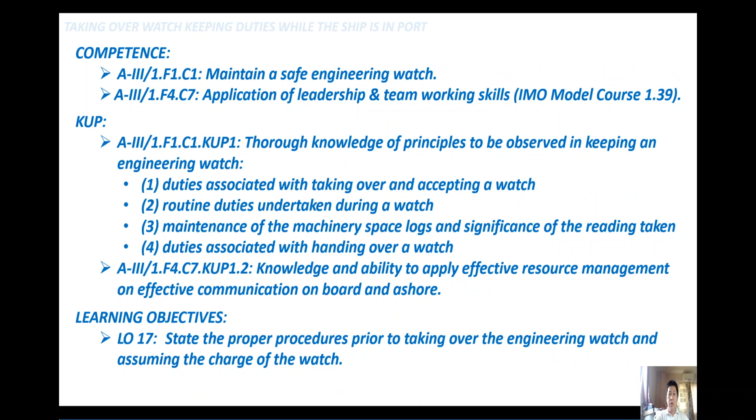So let us proceed. We have here: state the proper procedures prior to taking over the engineering watch and assuming the charge of the watch.

Prior to taking over the engineering watch, the relieving officer must be informed by the officer in charge of the engineering watch as to the standing orders of the day, any special orders relating to the ship's operations, maintenance function, and repairs to the ship's machinery or control equipment.

So here we have the sample of chief engineer standing orders. This is too small, but I can give you some examples here.

These are familiarization checklists, included in the standing order of the chief engineer. All engineers shall understand that the chief engineer is always available, that they can judge as necessary or appropriate. If in doubt about any instructions or orders, the engineer shall immediately seek clarification from the chief engineer.

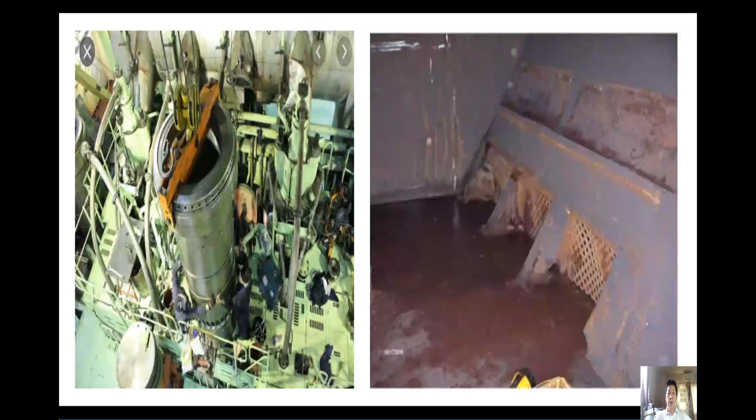These are several examples, but I'll show you one: the bilges or bilge water in your engine room, or let's say in the cargo hold. The relieving engineer should be informed that there is remaining water that should be pumped into the bilge tank.

So this should be informed because the bilge water should be monitored, and of course there is a bilge alarm system. It should be empty at all times, or in lower level. So the relieving watch should be informed about this bilge water.

Bilge area is the area in your engine room, and also in your cargo hold, where leaking water from your machinery goes. So that is bilge water going to the bilge area. This is the example.

So here we have an example, but we will not show you all of them. I will only show you the residue and bilges, because this is a lot and it takes a lot of time to discuss.

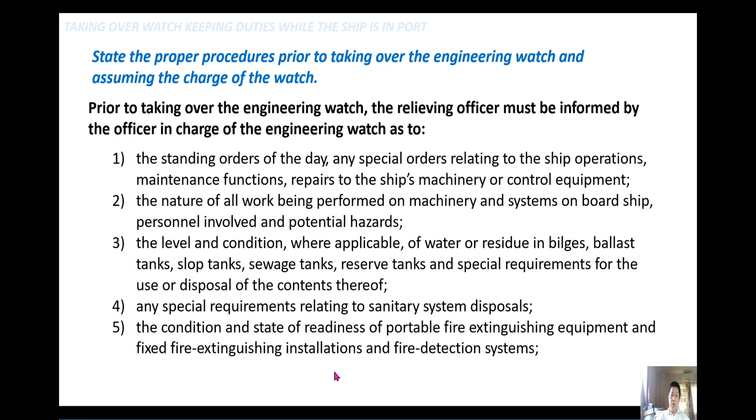So next we have sanitary requirements and disposal. One example is the sewage treatment plant. Then there's the condition and state of readiness of portable fire extinguishing equipment, fire extinguishing installation, and fire detection system.

Here we have an example - this is your fire detection system, and of course it is found in your computer, especially when your ship is operated with an automation system. You can find if there's an alarm in your computer monitoring system, so you should check your alarm if there is something wrong with your fire alarm system.

When it comes to the call point, you break the glass in case of fire and sound the alarm. This is the manual call point, and these are your heat detectors and smoke detectors. You should be familiar with where these are located so that if there's an alarm you can go there. The engineer on watch should hand over to the relieving engineer on watch if there is something wrong with the fire alarm, so you should be familiar with this.

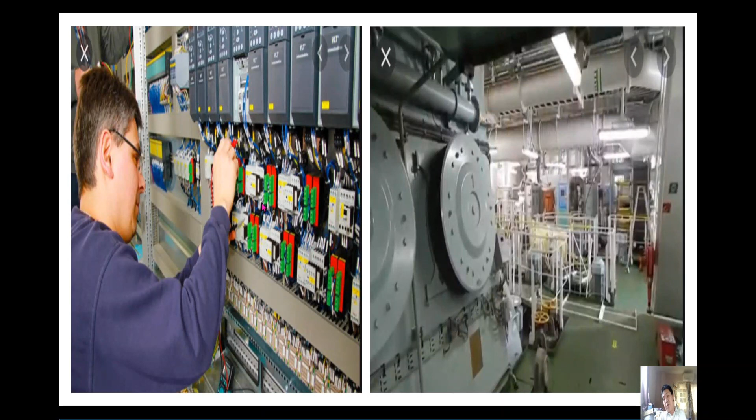So we have an example - if there is a technician on board, for example your ship is at anchorage or in port, and if the ship's engineer requests a repair of, for example, electronic or electrical equipment, while you are in charge of the engineering watch, when you hand over to the next engineer on watch you have to give instruction on what is done and what is to be done. If there's a technician working, this is for the purpose of safety and for recording, because you have to record in the engine logbook what is being done in the repair works in the engine room. So for an electrical or electronic system, you have to give instruction to the relieving engineer on watch.

So next, we have also here any port regulation pertaining to the effluents. Ship effluents is pertaining about the disposals, the sewage. And then firefighting requirements, and ship readiness, particularly during potential bad weather conditions.

So here also, this is your engine room. For example, if your ship is sailing or navigating and there is a bad weather condition, the captain is informing to the engine control room that there is bad weather. You should secure all the rolling objects here in the engine room. So if you are engineer on watch, you have to secure it together with your engine ratings on the watch.

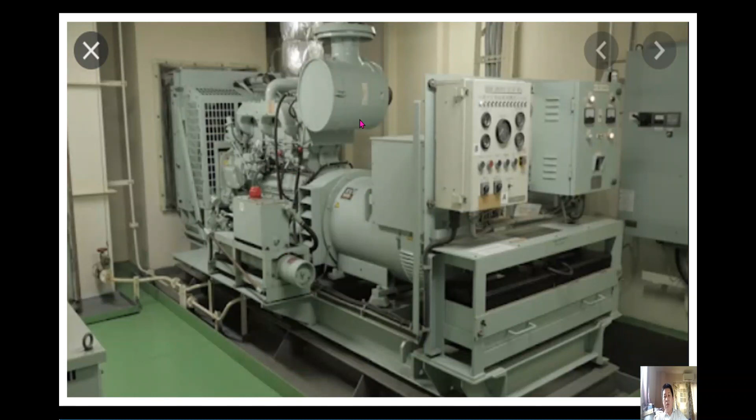So you should know how to prepare the main propulsion engine, and also, for example, your emergency generator should be switched to automatic mode, because in case of blackout, this emergency generator will start automatically within 45 seconds and give what we call emergency power to the emergency switchboard. Then the emergency switchboard will give emergency power to the lighting, vital equipment, bridge equipment, and engineering equipment for the purpose of emergency.

So next we discuss the principles applying to all watchkeeping in port. Prior to taking over the engineering watch, relieving officers shall satisfy themselves regarding at least the following: the standing orders and special instructions, which we already discussed; the nature of work being performed; levels of the tanks, the wells, bilges, slop tanks, reserve tanks; and condition of fuel and settling tank.

So the condition of the level of fuel in the settling tank and the day tank should be informed to the next relieving watch. If you are the relieving officer, you should check the day tank, the settling tank, and the other fuel storage tanks.

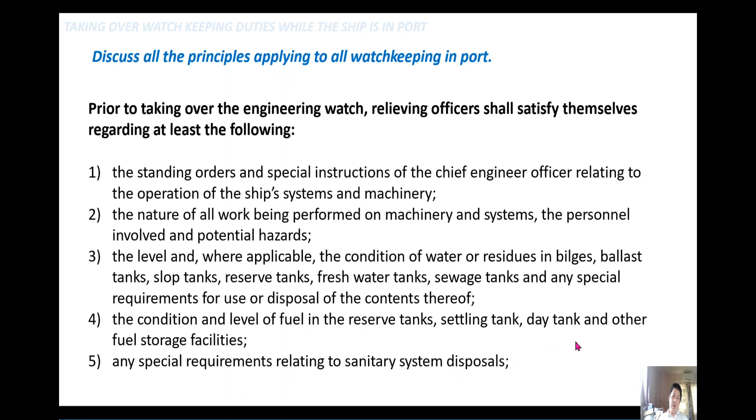Any special requirements relating to sanitary systems for disposal. As I said earlier, an example is the disposal of your bilge water overboard, and the disposal of your sewage. These are a few examples, not the only ones. So let us continue.

Here we discuss the principles and procedures that need to be observed when taking over watchkeeping duties while the ship is in port. When performing the watch, the person in charge of the engineering watch shall pay particular attention to the observance of orders, special operating procedures and regulations concerning hazardous conditions and their prevention in all areas in their charge.

So you have to observe all orders from the chief engineer, especially standing orders, and all important orders from your superiors. Instrumentation and control system: monitoring of all supplies and components of all systems and operation.

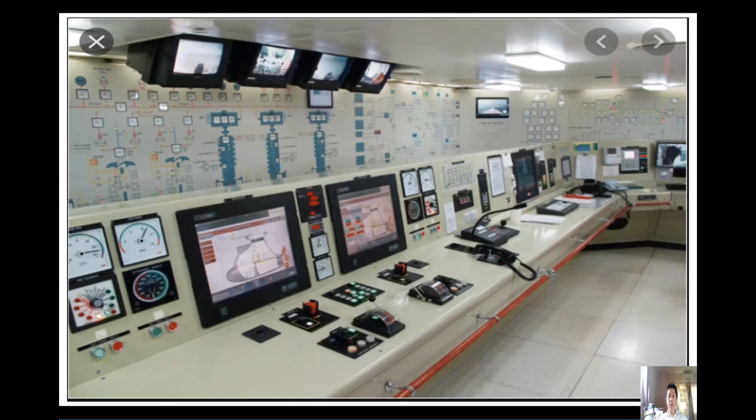So you have here your instrumentation. You have a lot of instrumentation in the engine room, and you have your computer monitor. So all the conditions here, alarms or whatever, the operational situation, you have to check all of this, all the instrumentation: amperes, pressures, temperatures. You can find everything here in your computer, in your instrumentation. You should be familiar with this as you take over the watch.

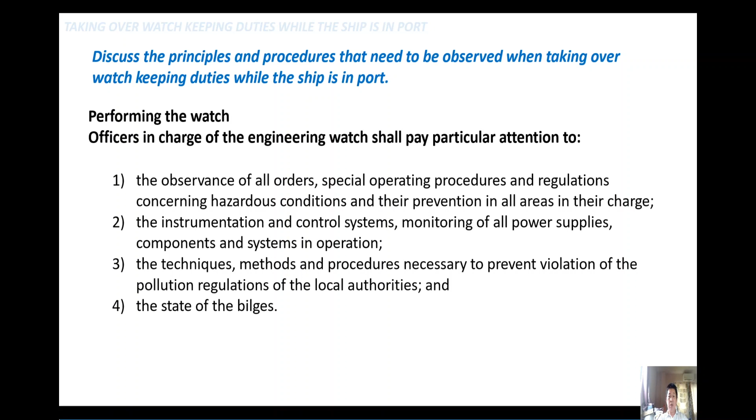So while in port: the techniques, methods, and procedures necessary to prevent violation of pollution regulations of the local authorities, and the state of the bilges. Everything you can monitor here in your control room, but on the other hand, your engine room round is also very important, because leaking you cannot monitor in here. So leaking, vibration of the pipes, you should make a round in your engine room during your watch.

So bilges, you have here the state of bilges, whether it is at normal level or empty. Before you relieve the previous watch, you should ask him what the condition is, and do not accept if there is a lot of bilge water in the engine room. You should tell the previous engineer on watch that he has to first pump the bilge water into the bilge tank.

So here we have explained that the officers in charge of the deck or engineering watch shall not hand over the watch to the relieving officer if they have any reason to believe that the latter is obviously not capable of carrying out watchkeeping duties effectively, in which case the master or the chief engineer shall be notified accordingly. The relieving officer of the engineering watch shall ensure that the members of the relieving engineering watch are apparently fully capable of performing their duties.

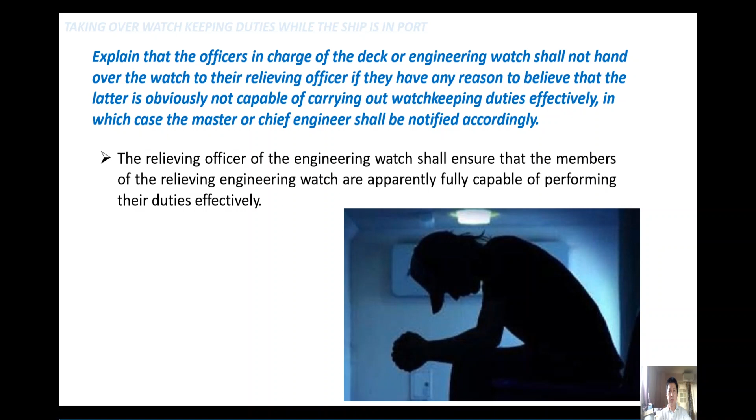So here, this system is an automated system, or what we call UMS, unattended machinery space. During night time, nobody in the engine room will do the watch. There is a watch in the cabin, what we call the cabin watch, but the engineer on cabin watch will go down if there is an alarm to be rectified.

So another thing here: when you are doing the watch, you should also check the logbook, whether all the operation is properly recorded. I remember before, when I was a second engineer on a ship, the third engineer was doing a lot of maintenance, but he was not recording it in the logbook. So I told him that he should record it in the logbook, because otherwise there is no history, there is no basis if something happens.

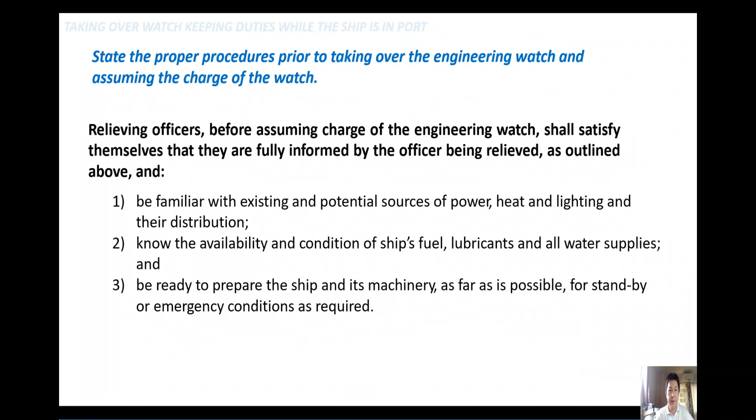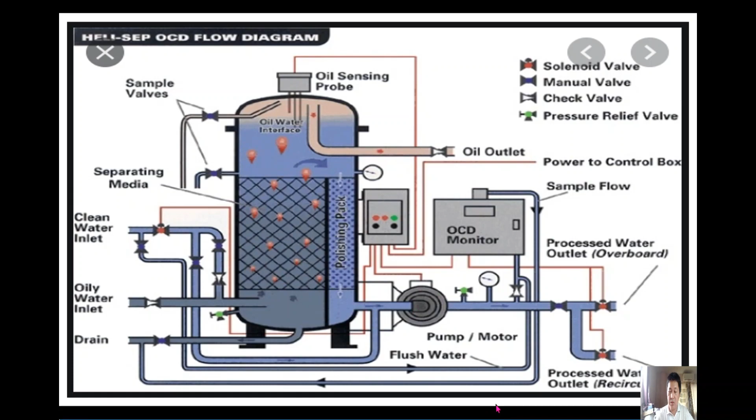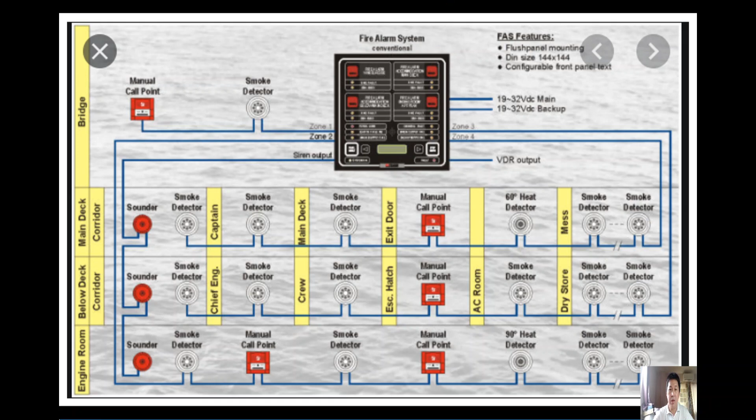Another thing, very important: disposals. Avoid disposals that pollute the environment, so you should be checking on this. The fire alarm system is very important; you should check on this before you take over the watch. This is disposal, sewage treatment; you should check on this before you relieve the watch. Maintenance, bilges, you should check on that. Standing orders of the chief engineer, whether they are followed.

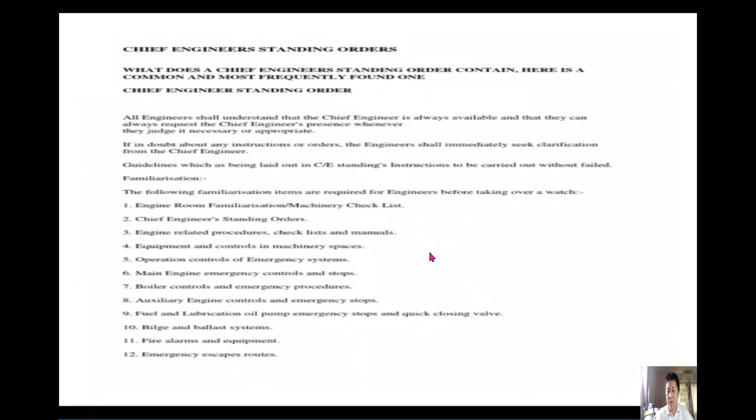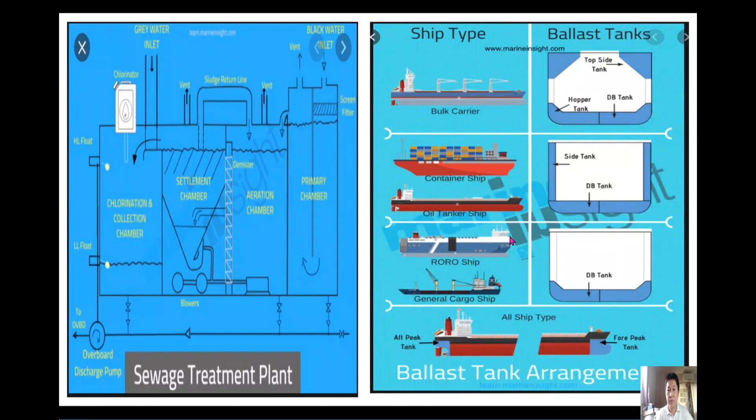So here, ballast system, you should check on that. Rolling objects in the engine room, you should check if they are properly secured. Bunkering operation: if you relieve the watch, you should be checking what is already done and what is to be done, because this is a very critical operation. Emergency generator, engine control room. So this is the end of the discussion.

So we have the oral recitation on procedures that need to be observed when taking over watchkeeping duties while ships are in port. We also have to conduct a class oral recitation during the discussion and give a quiz. I will schedule that later, since this is a recorded discussion. So you have to study this, write your questions in your notebook, and ask them during the virtual live discussion.